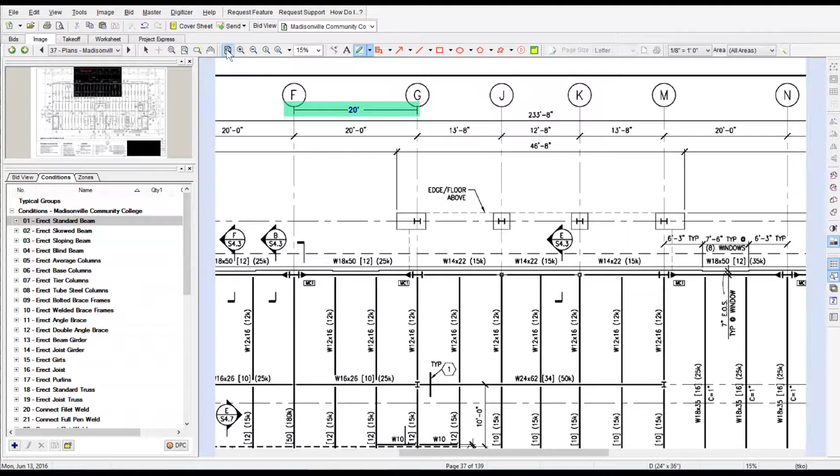In this video, I'm going to do a full takeoff on a 3-story community college, from start to finish. I'll put it into the Steel Erection Bid Wizard, get the price, the schedule, task summary, and schedule values. The project took me 1 hour and 49 minutes to complete from takeoff to getting the complete price. This video is sped up, so it will go quicker.

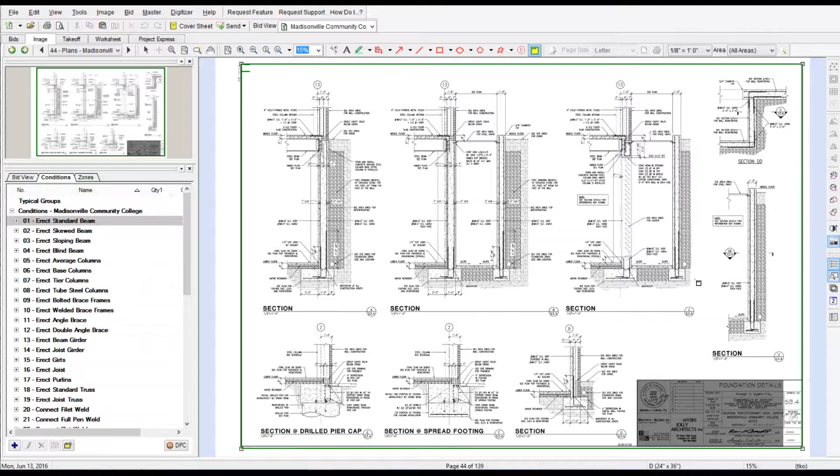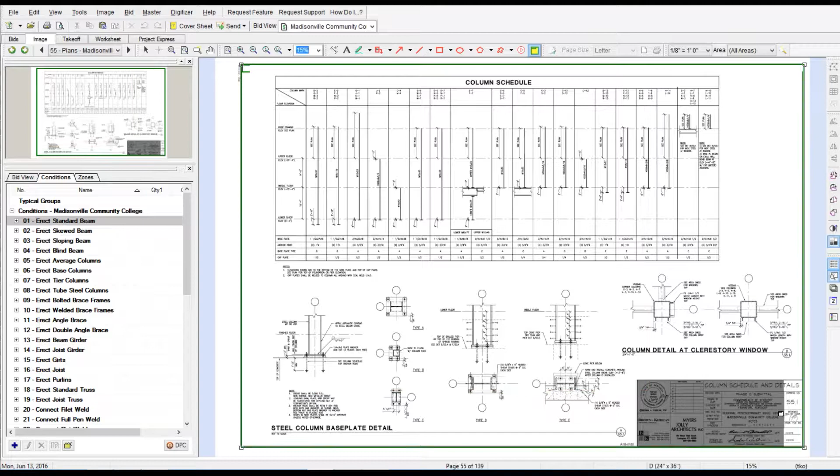I'm trying to give you a feel for this, and I'm going to create a video series showing the power of Steel Erection Bid Wizard and on-screen takeoff on all different types and complexities of projects, from simple warehouses to this 3-story community college, which is a bit more complex. I just want to give you the process so you can watch it quickly and see if Steel Erection Bid Wizard and on-screen takeoff is a fit for your company. I think you'll see that it is, and that it really doesn't matter what the complexity of the project is, Steel Erection Bid Wizard can get you a competitive price, and on-screen takeoff will get you that takeoff very quickly.

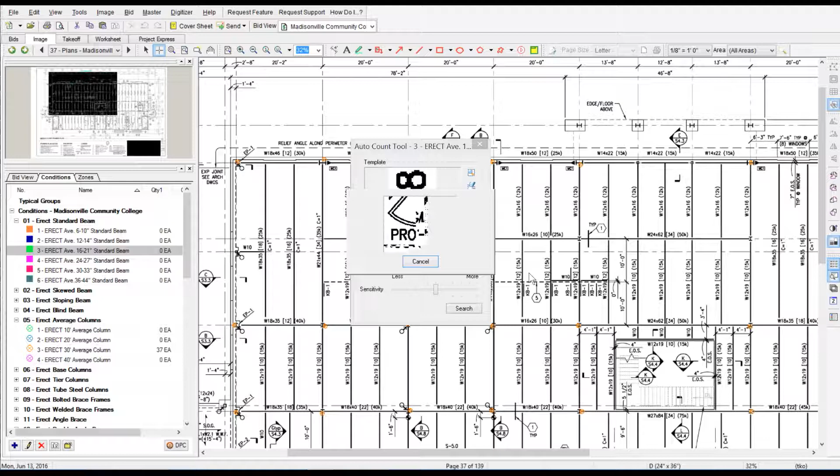So basically, I went through and verified all the scale was correct on all the takeoff sheets. Then I set up the detail sheets, and now I'm going through and doing a quick count. Right now you see me using the auto count feature inside on-screen takeoff.

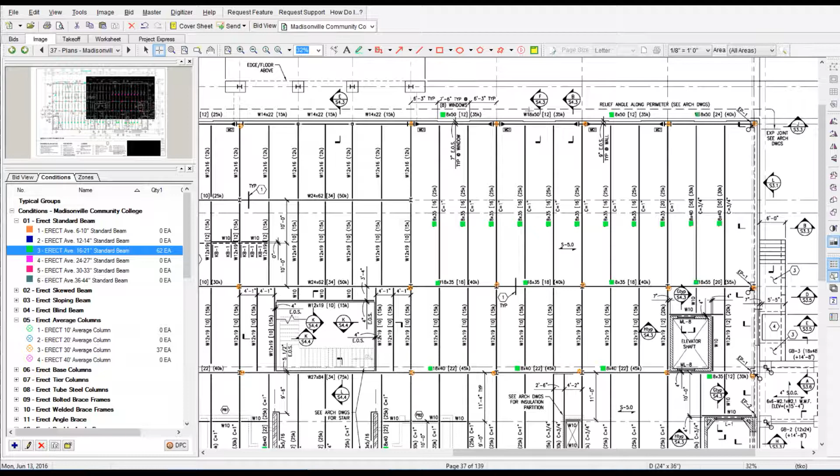This really speeds up the process. The results depend on the quality of the drawings, of course, but it definitely speeds things up and will count those beams for you automatically on the page. Of course, you still have to go through the page and verify that all the beams were counted, but it's just a way to speed up the process.

Sometimes I'll do an auto count, and sometimes it's just quicker to go through and count manually, depending on the project. It might be quicker to count by hand than mess with the auto count, but on this project, the auto count was a good fit.

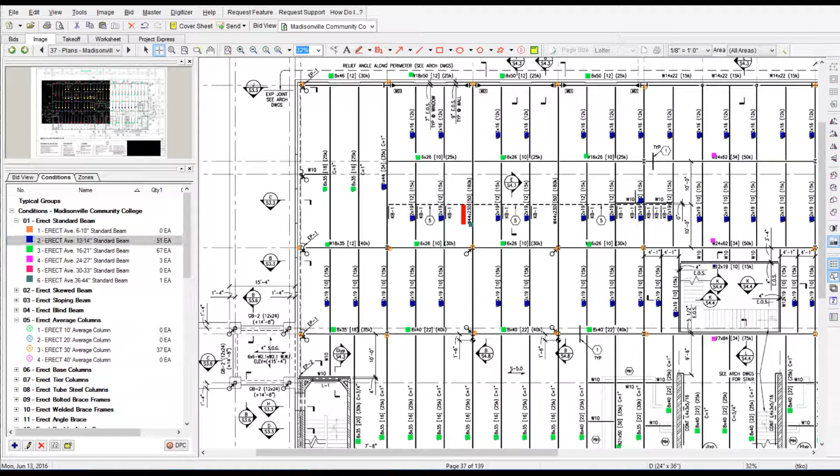You see I just highlighted that beam in red because it was like a 250 pound per foot beam. So that's just a quick callout to myself to make sure I get a crane that can handle that beam.

I'm not going to sit here and talk this whole time. This video is about 22 minutes long from start to finish, but I want to keep that whole video in there to let you see the full takeoff process, all the way from the export out of on-screen takeoff to the import into the Steel Erection Bid Wizard, where you get the price, schedule values, and the whole process.

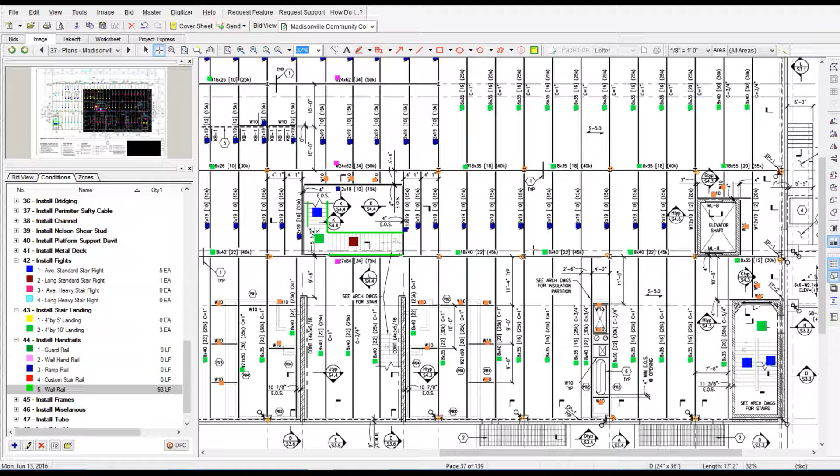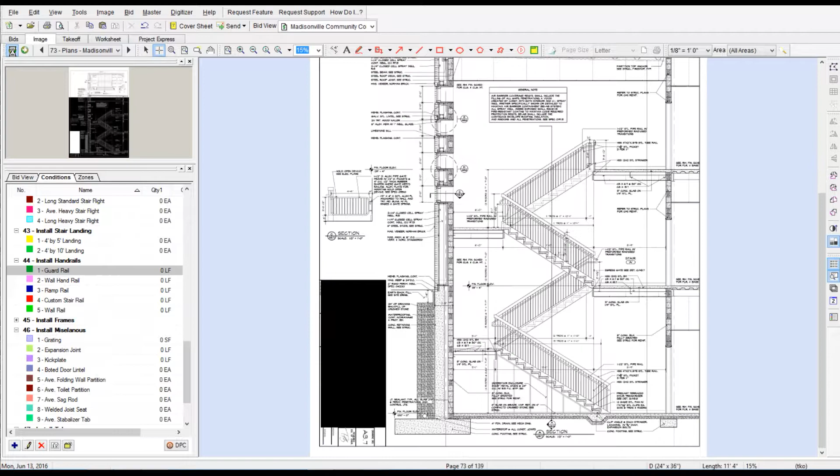I started using on-screen takeoff in 2002. Once I got it set up, I started developing the Steel Erection Bid Wizard around it, and over the years it's evolved into a completely different animal from day one. I developed the Steel Erection Bid Wizard to work with on-screen takeoff because I went digital in 2002 and wanted to figure out a way to simplify the takeoff estimation process so it could be foolproof. Really, you're basically building that job on the plans during takeoff, and then going out in the field and building it in place again.

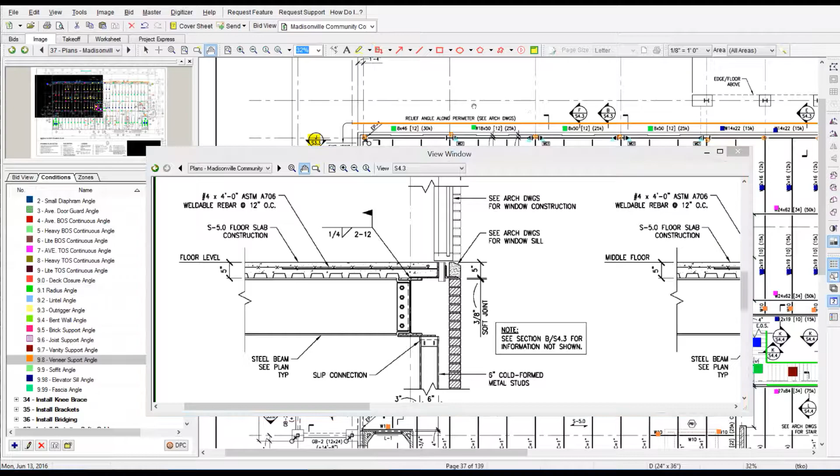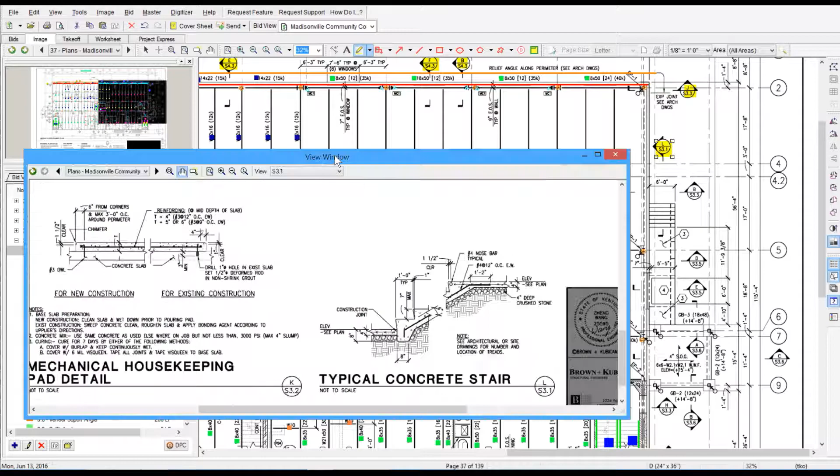I want to put this out there with different complexity of projects because I know it's hard to go from old school type takeoffs. People are set in their ways, but the world has gone digital, and a lot of erectors still do pencil and paper takeoffs on yellow tab, just doing it old school. The tools are out there to make that transition, but it's harder for the older generation to embrace the digital world, and some just won't do it. But we have a new generation coming into our industry that's good with computers.

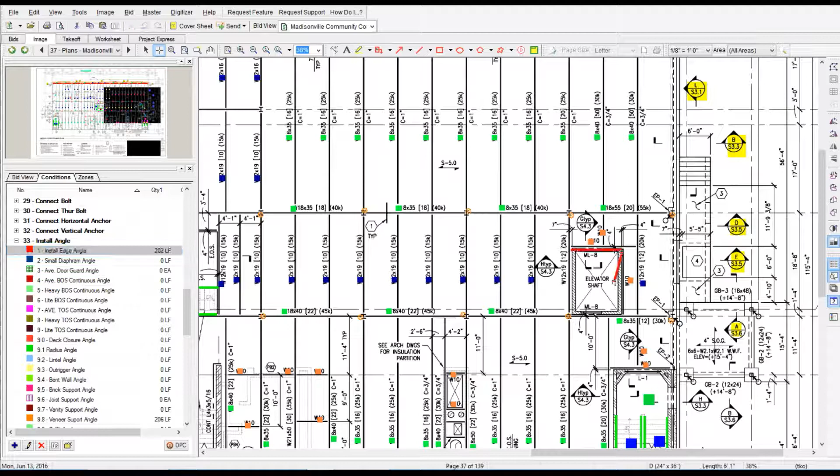What I see as a benefit of the Steel Erection Bid Wizard is a company's ability to take that estimator's knowledge and plug it into the Bid Wizard, make it fit your company, add your own tasks, add your own production rates, and take that long-time estimator's knowledge and plug it in. That way, when he's ready to retire, you'll have a system in place and can simply train somebody else to take that position over.

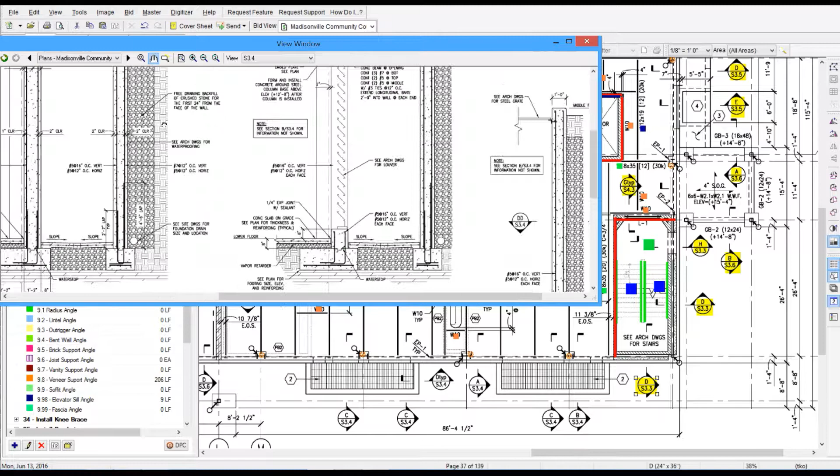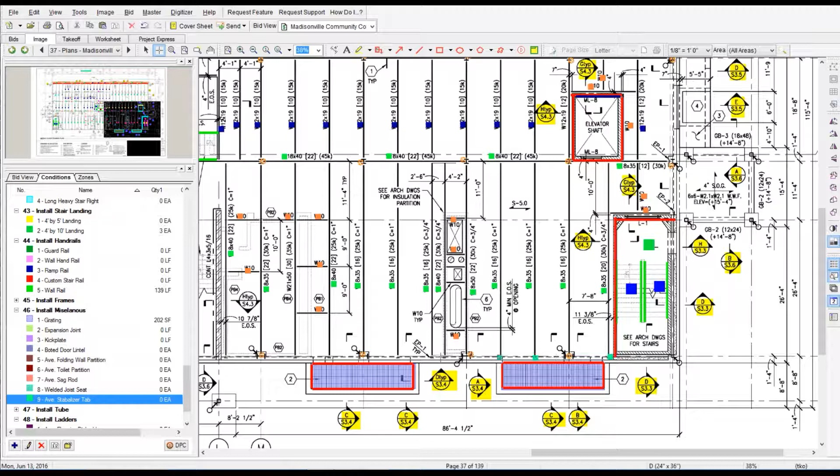So you'll see me going into every detail, and you'll see my second view window on the one screen. I wouldn't do that normally - I'd have it on a second screen off to the left - but I'm putting the detail sheet on the main plan so you can see it in this video. It slows me down because now I have to drag that detail view window back in every time, where normally I'd just be looking left to right.

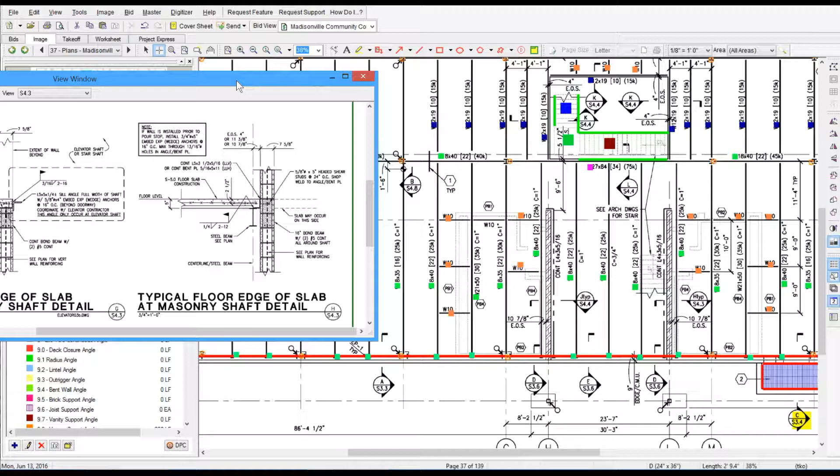I'll say it again, you're better off spending the money on large computer monitors. 27 inches would be the smallest I would go, 32 inches would be the best - I'd definitely say a 32-inch computer monitor is ideal. The reason I say computer monitors is because the resolution is so much higher.

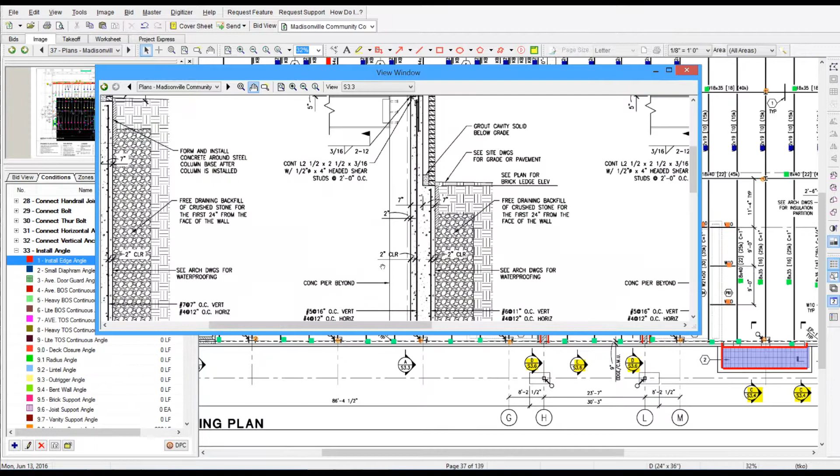A lot of people want to go get a big screen TV because they're cheaper and have a huge screen. The challenge is, yeah, they call it high definition, but in my experience when you put that plan on a big screen it isn't as crisp because the resolution isn't as high, so you don't get to see the plan all that clear. The more resolution you have, the easier it is on your eyes to read that plan. So even with a big screen, you'd still have to blow the plan up to actually read it, even though it's huge.

That's why I suggest a 32-inch screen with the highest resolution you can get - it's like 2450 by 1650, something like that. You'll be able to look at that plan just like you're sitting there looking at it on a table. If you get an estimator set up that way, with two large screens, where he's not straining his eyes and not having to pan in and out so much, it makes a whole different ball game.

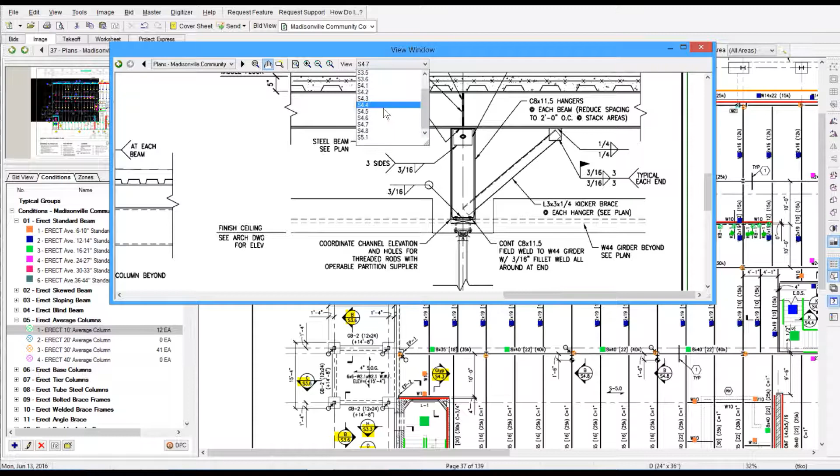One thing I point out too, in the Bid Wizard I've got right at 300 tasks, and of course you have the ability to adjust those tasks, rename them, change production rates, do all that. But what I really want to point out is...

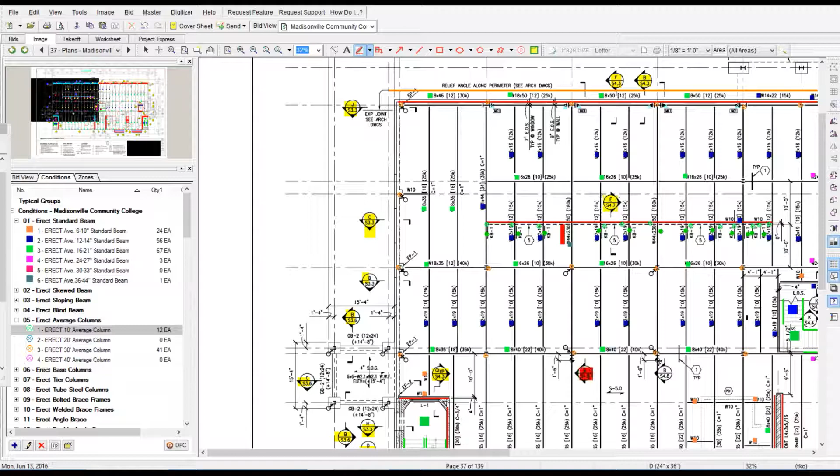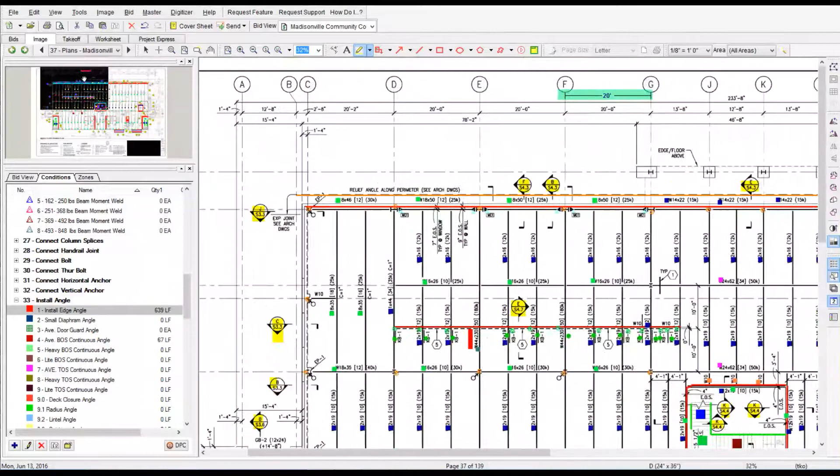You might see on a project some HSS tube steels, some bolted for a curtain wall, whatever it may be. In my program, the mindset I use is: if it sets like a beam, hangs like a beam, I'm going to take it off like a beam. So if I had an HSS tube steel on a curtain wall, I'd take it off as a W21, something like that. If it's welded on each end instead of bolted, I'd probably jump it up a beam size, or go up to a blind category just to cover the weld. But of course you have the ability in the Bid Wizard to change that task, make your own task calling it HSS tube steel bolted or welded, and get a production rate for it, so you're taking off exactly what it is on the project.

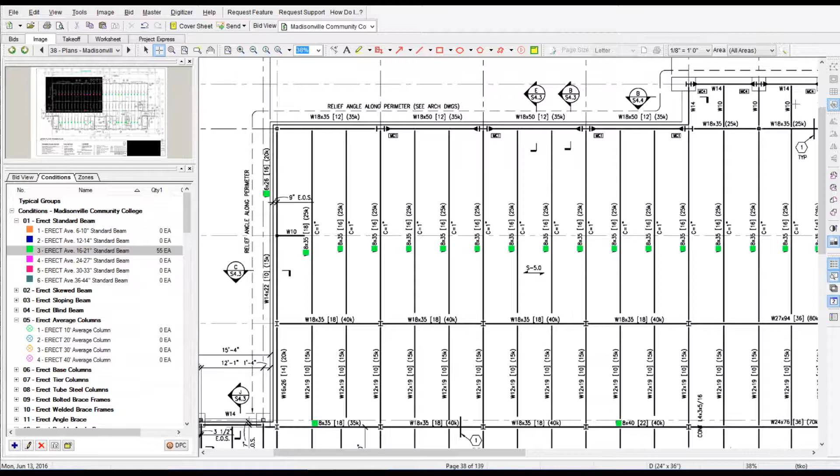To me, as long as I picked it up, I was happy. So like another example, elevator guide rails - if it sets like a column, you could take it off as a column.

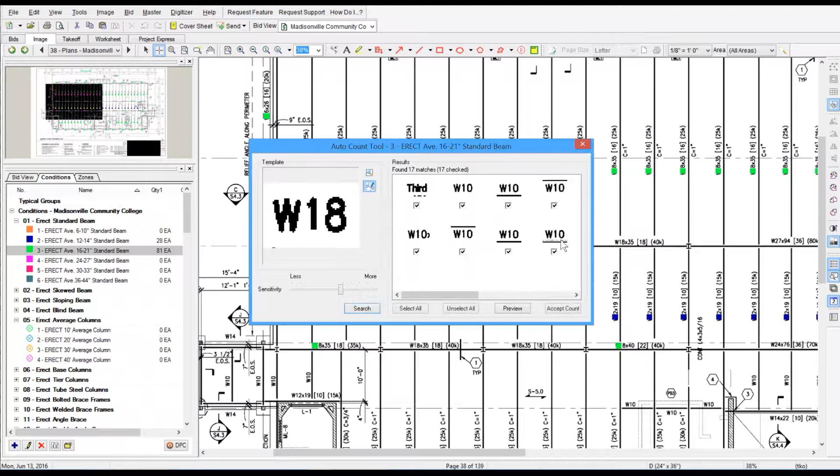Now, elevator guide rail, I would take it off as a blind column. That would get me the dollars in that guide rail, enough money in that guide rail off a blind column. But that's entirely up to you. You've got to look at the production rates that the Bid Wizard spits out and decide whether you want to do it that way, or create a task called elevator guide rails.

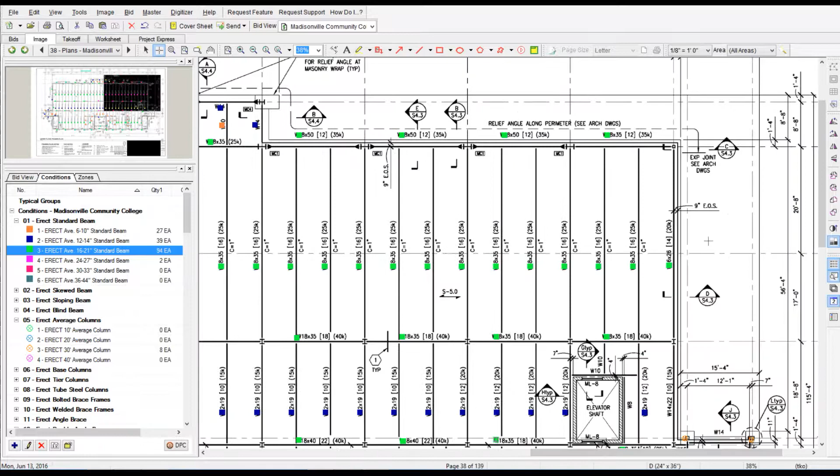I've said it in other videos before, I think the hardest part about going digital for any takeoff program is creating the conditions. And what I mean by conditions is the beams, angles, columns you see on the left-hand side of the screen that I keep clicking on and counting. Because when you buy a digital takeoff program, it doesn't come built with those conditions. You have to build them.

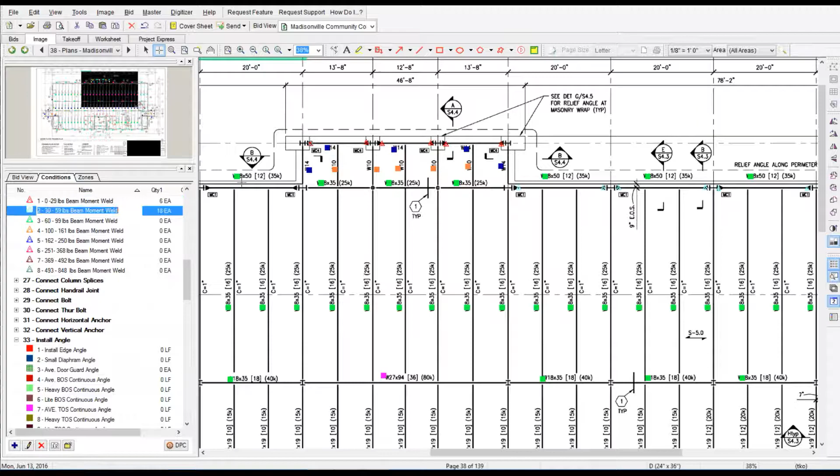At Steel Estimating Solutions, I create that. It's called a plug-in. So if you purchase Steel Erection Bid Wizard and decide to go digital with on-screen takeoff, I give you that plug-in. You plug it into on-screen takeoff, and out of the box, you're ready to start doing a takeoff.

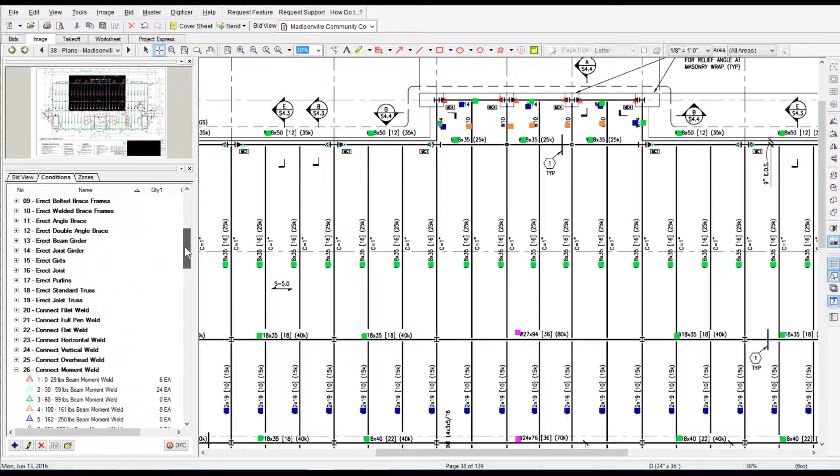But with that said, I also integrate with 3 other programs: PlanSwift, Bluebeam, and FabSuite, which are all great programs. FabSuite is more for a fabricator, who does the fabrication takeoff inside FabSuite, and it pushes the erection portion out into the Bid Wizard, which makes it real sweet. The fabricator just does one takeoff, and gets his quantities for his erection price out of FabSuite to go into the Bid Wizard.

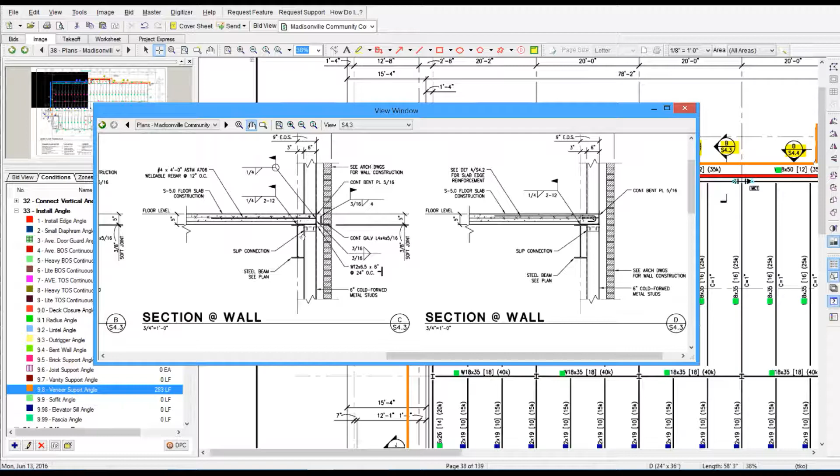PlanSwift's a good program. I just like the functionality of on-screen takeoff better. It's been around since 1988. I think it's the Cadillac of all programs.

Bluebeam is an amazing program as well. The only challenge with Bluebeam at this point is you cannot copy and paste, which is a huge time savings when you're doing a takeoff with typical bays, where you can take off one bay, copy it, and paste it in the other typical bays. But you can't do that with Bluebeam.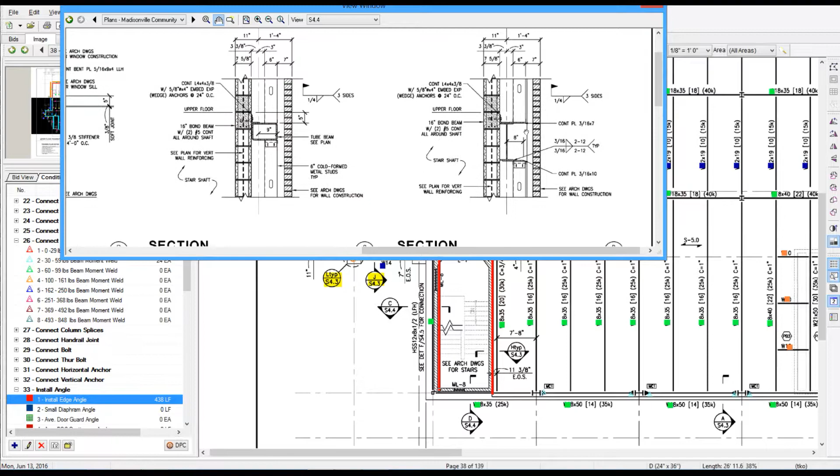I would say Bluebeam is probably about 75% of a true takeoff software. That wasn't what it was designed for, that wasn't its intent. But Bluebeam has some amazing features and it's much cheaper. You just don't get the full takeoff benefit.

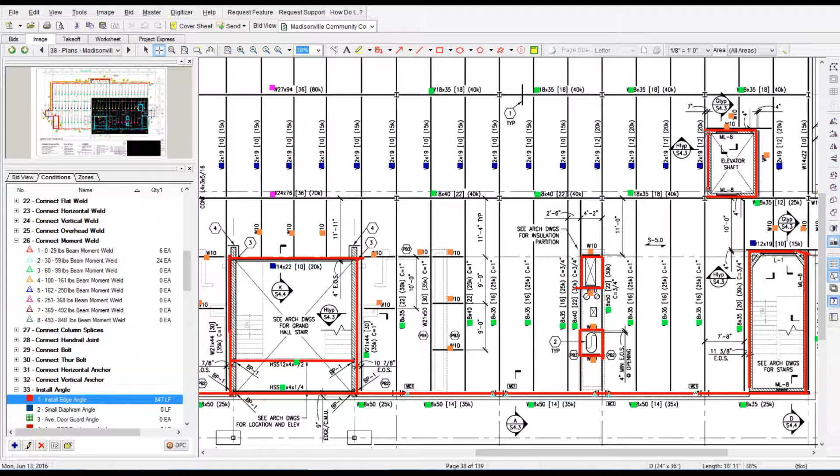So in my opinion, a person needs on-screen takeoff and they need Bluebeam, because Bluebeam has some really good fill components and a lot of other benefits inside of it as well. I'm not a reseller for Bluebeam, not a reseller for PlanSwift, not a reseller for FabSuite. I partnered up with on-screen takeoff, and that's the program I sell.

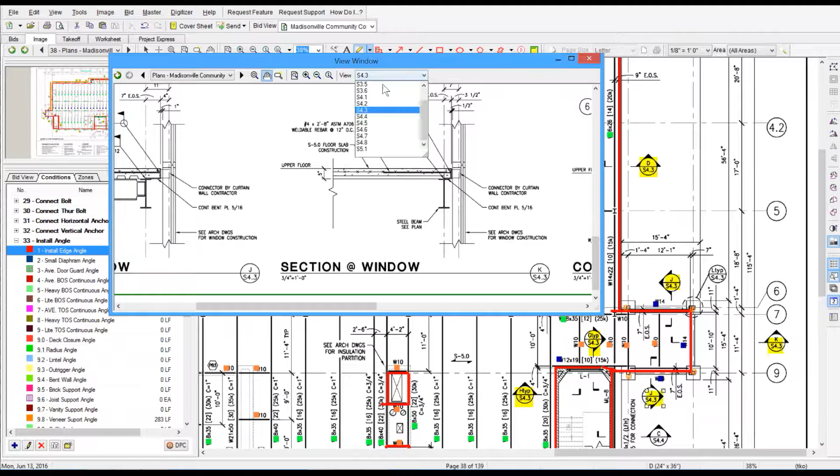You can see as I'm going through, I do have the video sped up, but you can see me taking off deck right now, and how much quicker you can just run through there. It doesn't matter the shape of the building, I get an exact square foot for that project. And I'll point out, you're going to see me put deck over top of the stairways and some of the openings.

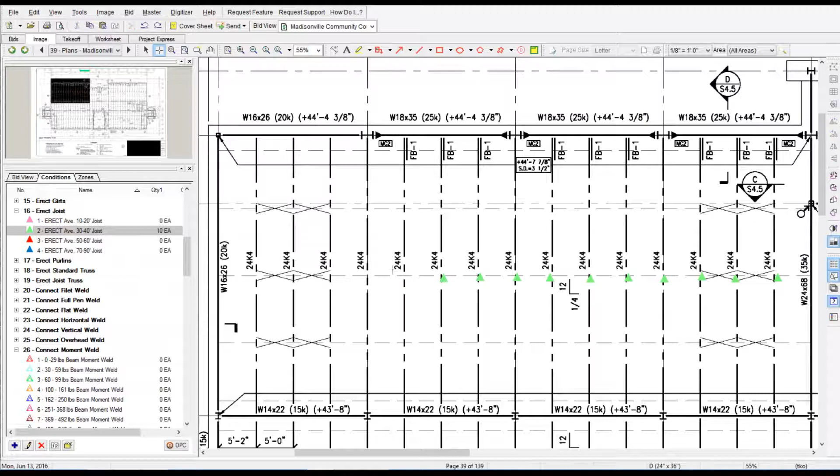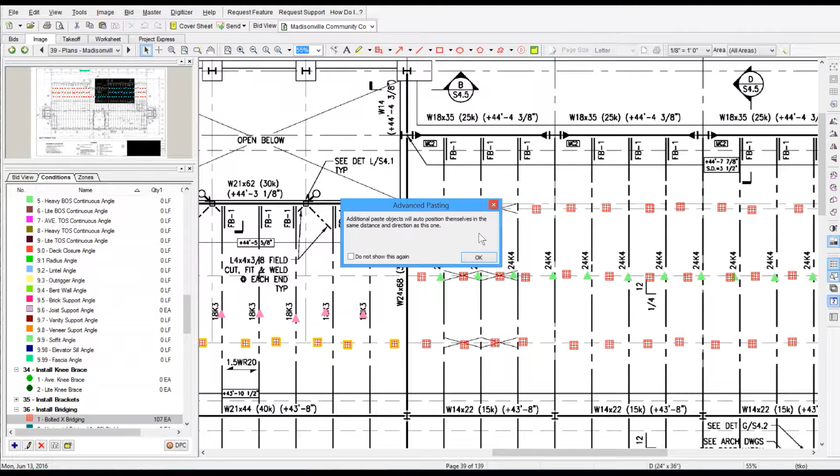I don't cut those out, and I do that on purpose, just to kind of pad the job. If you wanted to, you have the ability in on-screen takeoff to do the takeoff and then cut out those areas around the stairways. For myself, it just gets me a little bit more money, a little bit of padding in there. If I was trying to get really tight and it was real competitive out there, I'd probably consider cutting that out, but I never did. I always just went over it and called it good.

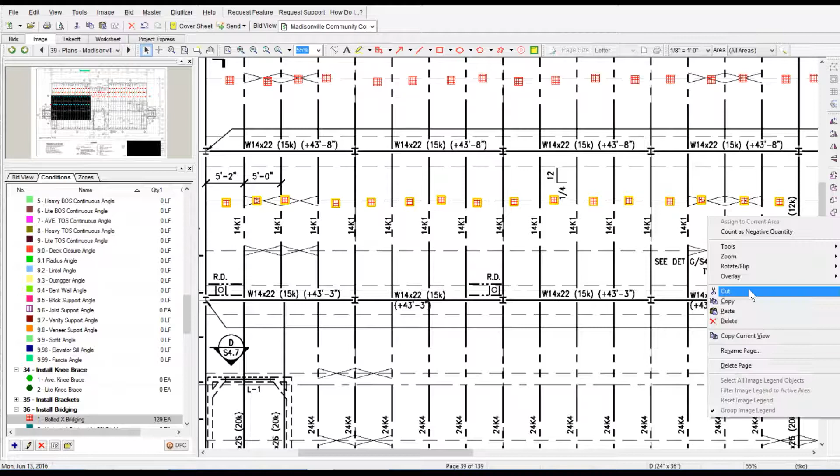You can see what I'm doing right now. I'm up on the roof. There's bar joists, there's like areas, so I'll just take off a section. This project has some X bridging, so I count the X bridge and the joist in that one area, copy it, and start pasting in other like areas. Then go to the next page, just copy the X bridging, move it into place.

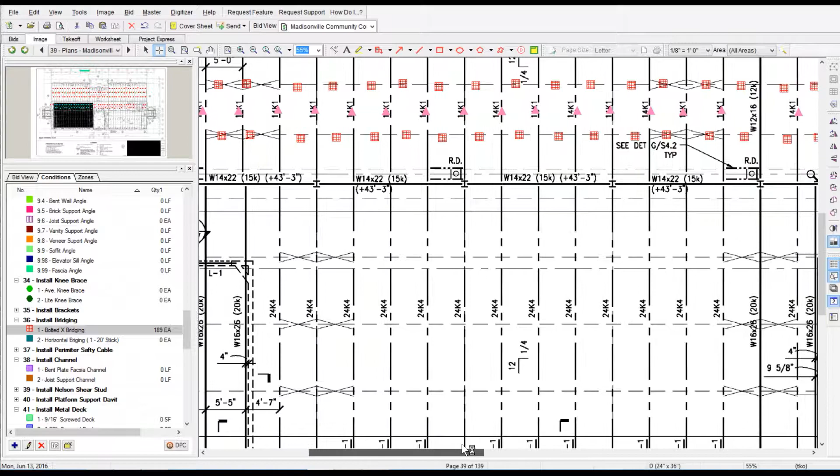You'll just see how it speeds the whole process up, so you're not sitting there clicking away. When you look at it from this aspect, when I talk about on-screen takeoff being copy and paste, and you don't have that ability in Bluebeam, you can see where it would definitely take you a lot longer to do a takeoff.

In all my advertisement, I always say I can save you 50 to 60% on your takeoffs and your estimates, and you're seeing it in real life.

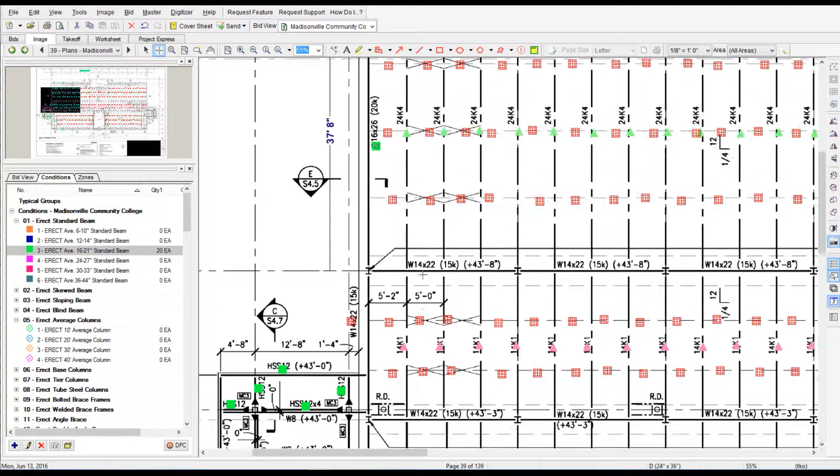Right now I'm doing a complete, detailed takeoff, and it took me an hour and 49 minutes to do the takeoff, upload the plans, put them in the system, do the takeoff, bring it into the Steel Erection Bid Wizard, get my price, adjust it, massage my bid, have my task summary built for me, broken out by area, which you're going to see here at the end. I break this whole thing out by area, by floors. And I also have the schedule built for me.

My bid proposals are one-touch bid proposals. I can bid up to 10 general contractors at the touch of a button.

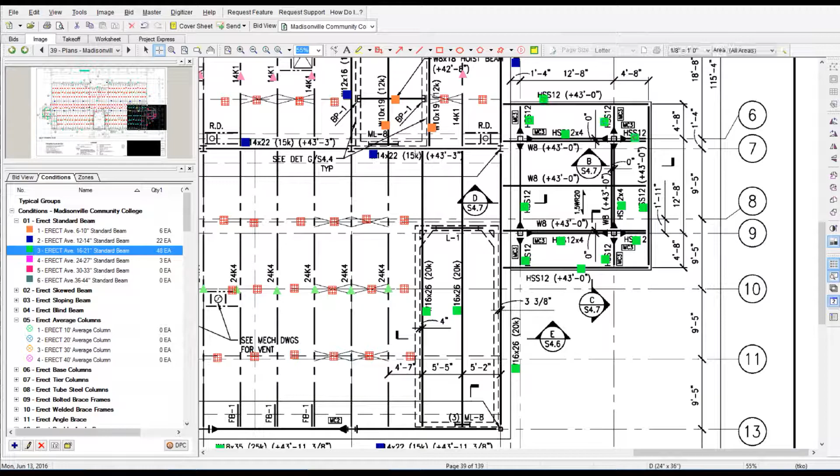So that's the process. I don't know how long it takes somebody by hand to take this project off, but I know they're not going to do it in 2 hours with complete price, schedule built, bid proposals and everything made. It's just not going to happen. I'd say you're probably looking at 4 to 6, maybe 7 hours to do this takeoff if you're doing it hard copy.

Now, granted, you could look at this job and say, with your experience, do a square foot project, square foot the building, and say, yeah, it's going to be this much a square foot. Throw a price out there, which I did in the past as well. Just throw a square foot price, look at it, say well it's going to take this long, throw a quick number at it. But the reality, we got away from that.

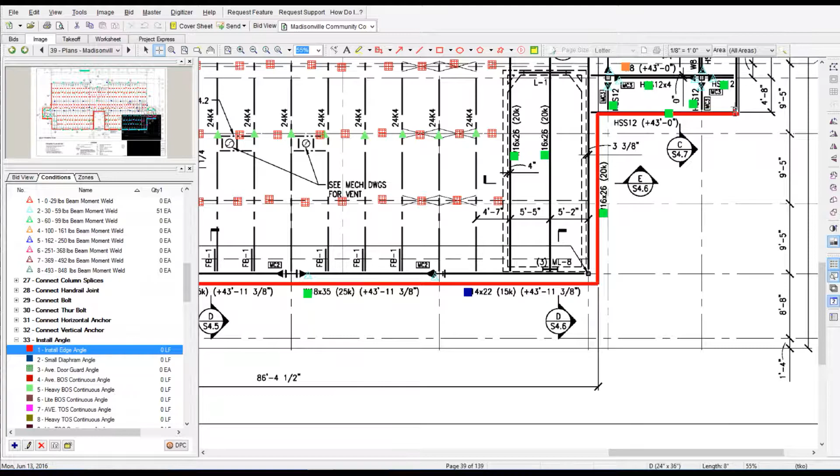We got the tool here to do it fast. And what I'm going to get out of this is I'm going to start creating data, and I'll be able to track exactly where my money's going, where I need to improve, where I might have dropped the ball. Everything is trackable at that point. Where on a square foot price, yeah, you're out there, got a quick number out there, but to get any trackable data out of it, it's just not going to be there.

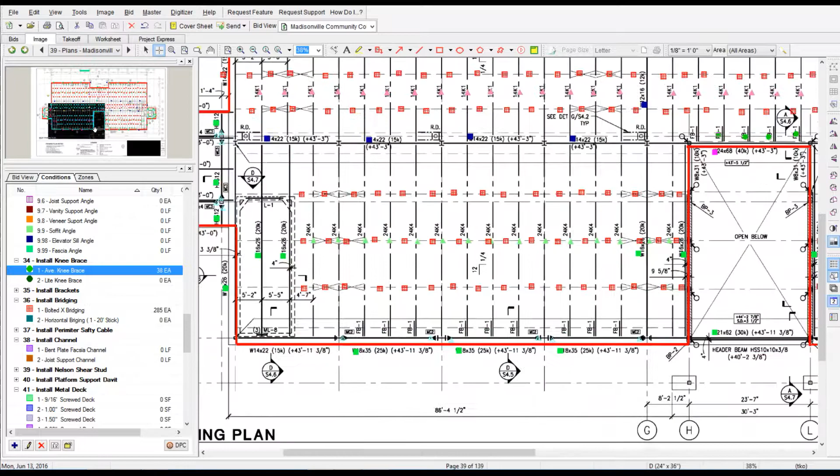And then on the back end of this, I'm in the process of creating a project management wizard, which is going to tell you in real time whether you're making money or not, which is going to be another benefit, because that's always a challenge. We're out there on the site, we don't know whether we're making money or losing money pretty much till the end. We can track our costs, see where our dollars are going, but we truly don't know whether we're making money or losing money till we get to the end of the project. The project management wizard is going to change that.

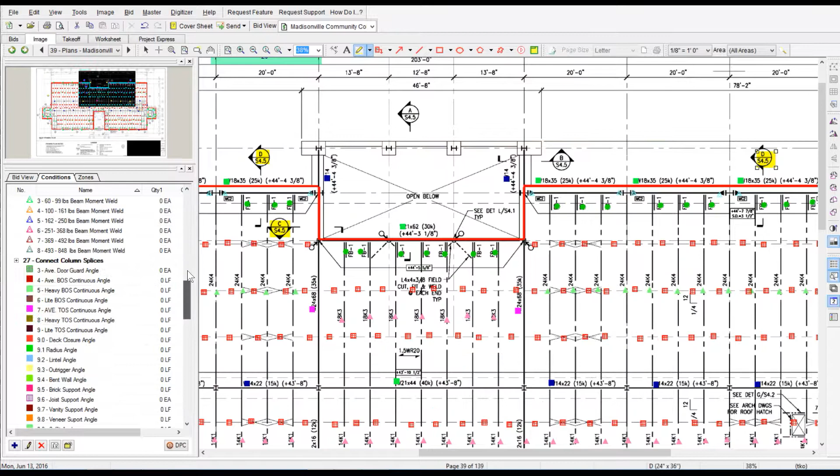Plus, it's going to have an equipment tracking feature, help you with payroll, help you with month-end billing, and continue to build from there. That's my goal, I want to be the go-to guy for steel erectors in this industry, and that's what I'm trying to do.

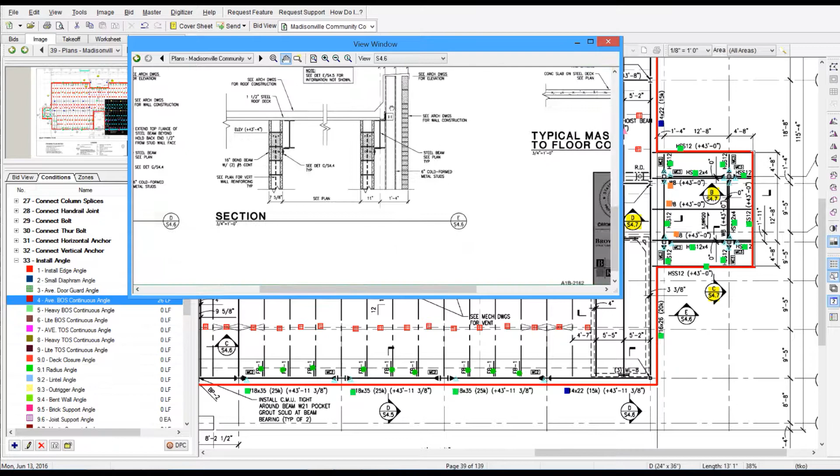We're almost to the end of it. I think we got about five more minutes, something like that.

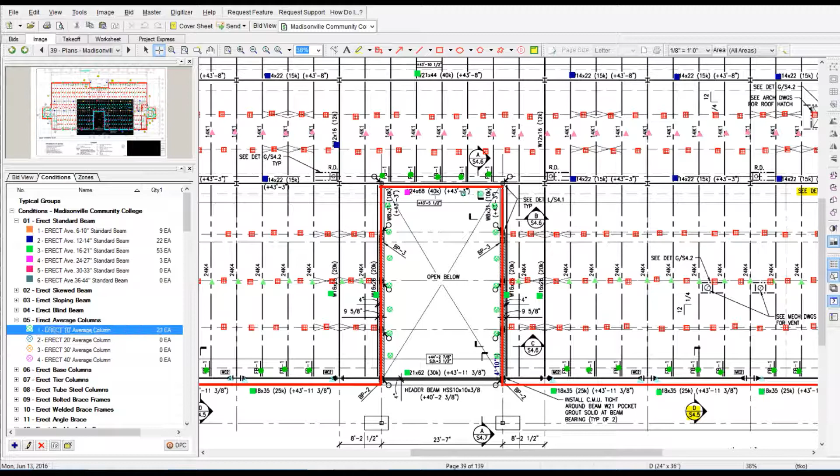And that's another thing, you see me marking off all the details. So you look at that detail, take off the detail, and highlight the detail, and it's taken off. That's on-screen takeoff—it's colored, it's counted. You can't go wrong.

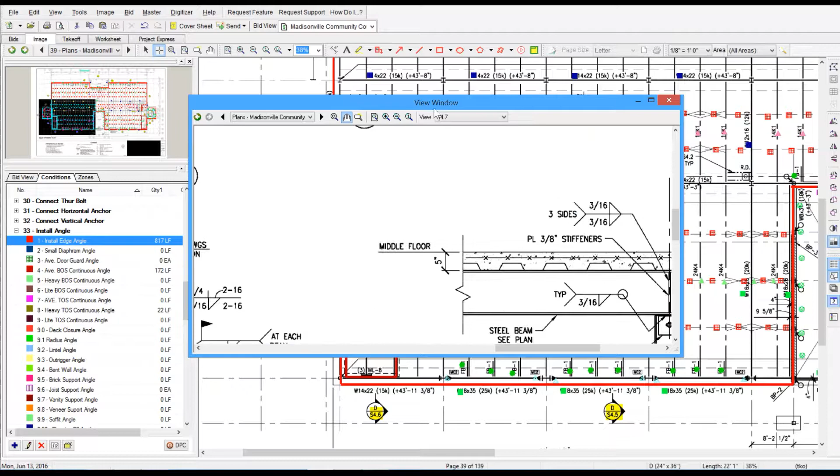It really doesn't take that long to run through and look at all the details, especially if you have that second screen up—looking left, looking right, you're not flipping pages. You're just going to that detail window. At the top of the detail window there's a drop-down box, you go down to that detail, select the sheet, and go to the detail. Makes it simple, fast.

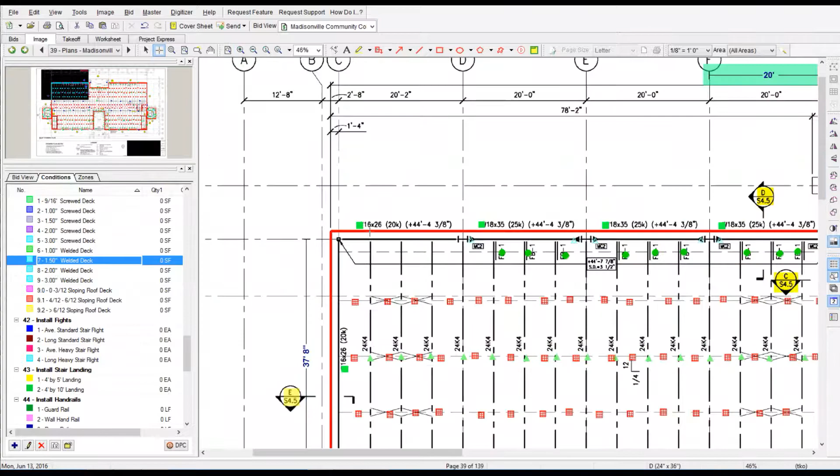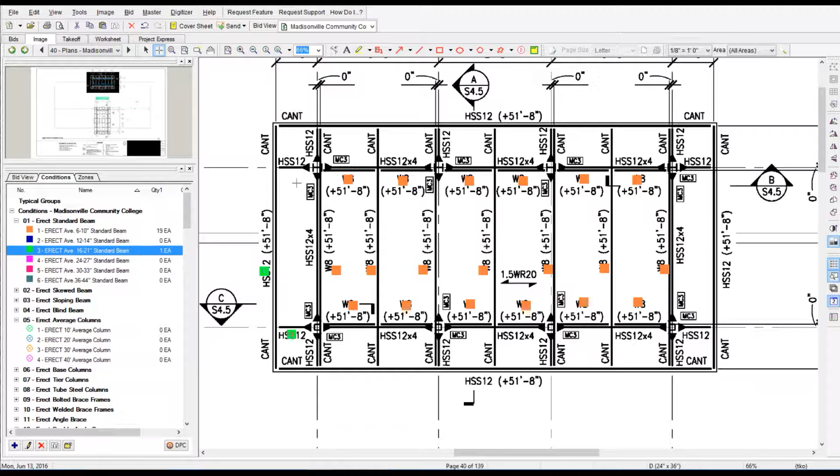You see up here on this roof there's a bunch of HSSs on the high roof. I'm just taking them off as a 16 to 21.

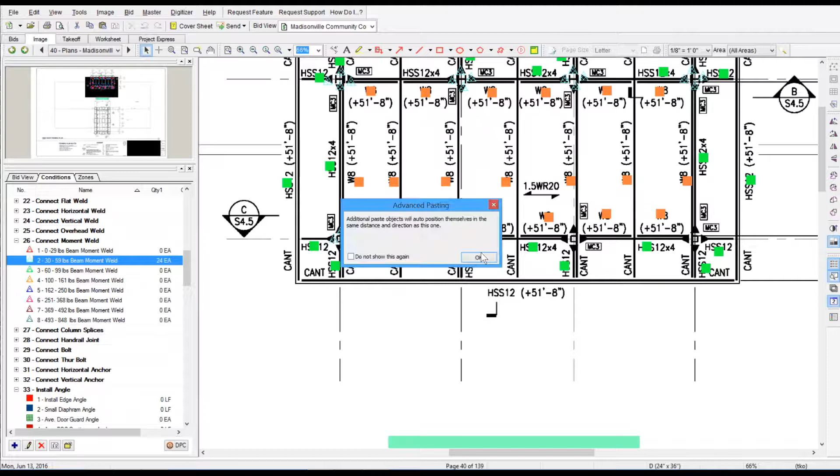Now we've got all these moments that are the same, so I just start copy and pasting those. Instead of clicking 4 times at each one, I just copy and paste, and it cuts down on the repetition.

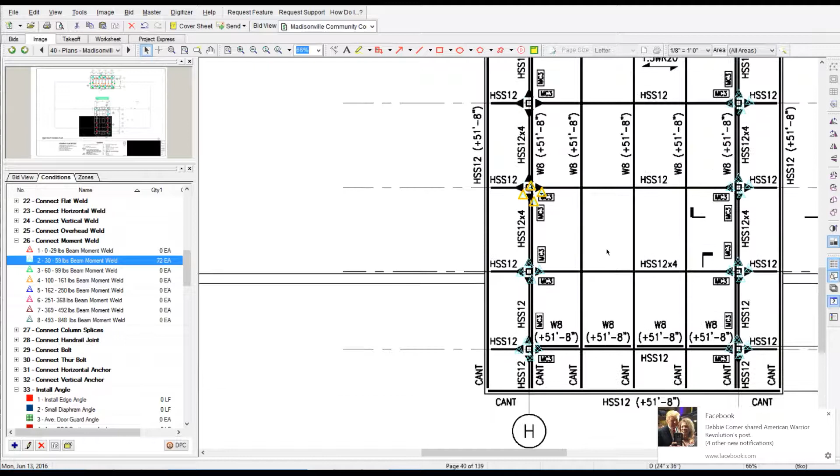Once you get past the learning curve, it really is pretty simple—once you get past learning how to get around it. And with me, I'm available to help you guys out, get you started, get you past that learning curve. That's the service I'm providing, helping you transition to going digital.

And I tell you, once a person goes digital, they'll never go back. I started doing this back in 2002, and after I got it down, I never want to see a hard set of plans again.

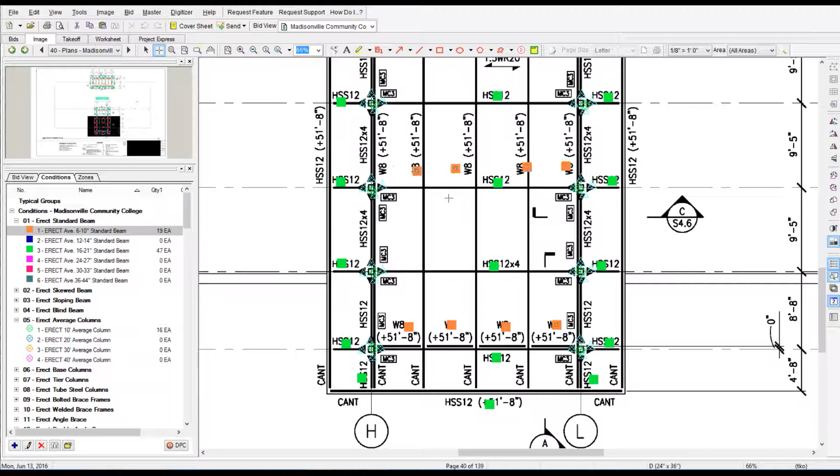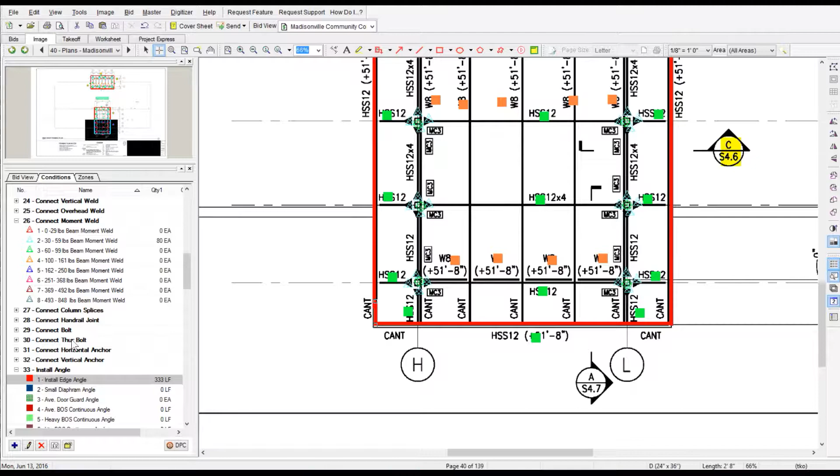Another thing we haven't talked about—say this project was a 65% project. We're doing design build, and then they send me out 3 weeks later at 80%. I simply come in, take those 80% drawings, overlay them on the drawings I just took off, and everything new comes out in red. So instead of retaking the whole job off again, I just take off what's in red, and we move forward. That's probably one of the biggest time-saving features I could possibly have.

We did a lot of design build, and that was always a pain, having to keep relooking at the jobs.

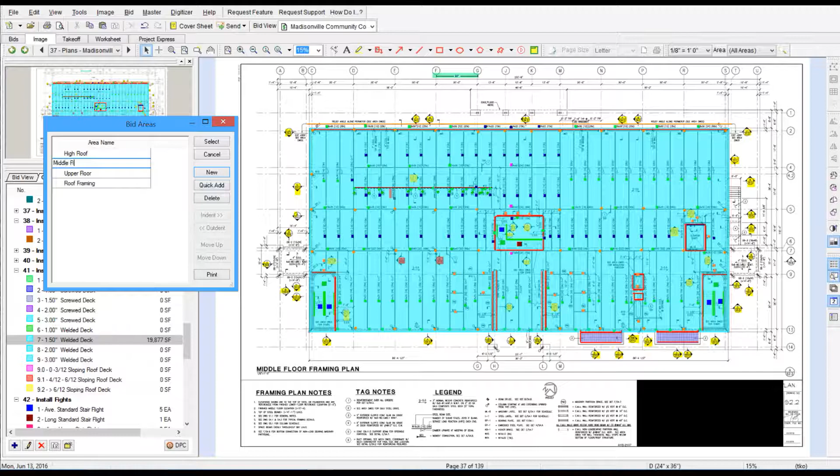So right now I'm setting up the areas—we just did high roof. You type in the area, select it, and assign it to that area. Now I've got all these takeoffs assigned by areas, which is sweet, because my price is going to be broken out by area.

Now I'm exporting it out, saving it into the job folder. Then I go inside the bid wizard, create a new bid, go down to task. I've got to create the areas in the bid wizard before I do the import.

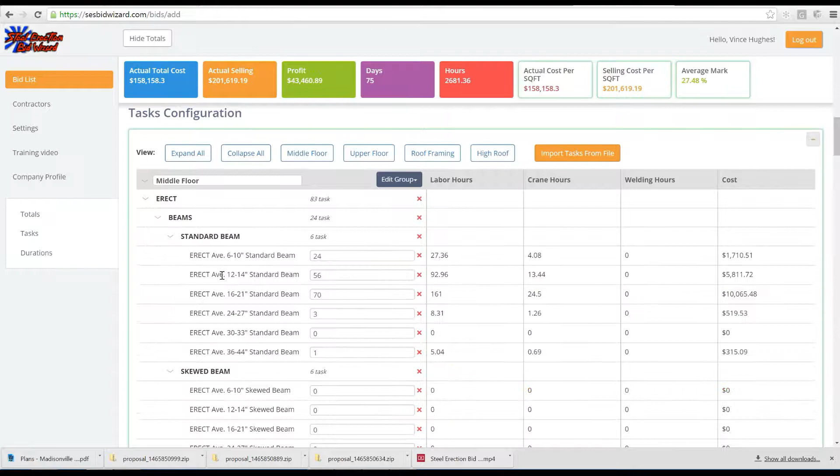I'm adding equipment right now—real simple to add equipment, of course it's pre-set up inside the system. Add your crane, massage the bid a little bit.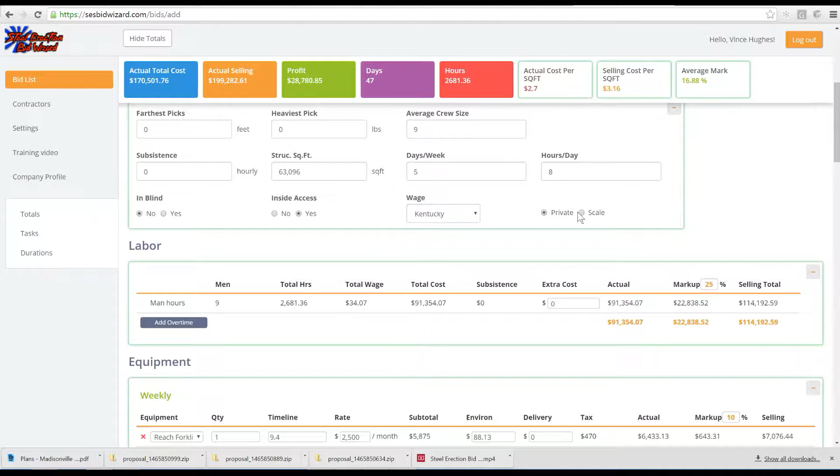You can see where you can have different scales for different states depending on where you're at. If you work in multiple states, Bid Wizard makes it real nice because you can create many different wage rates wherever you want to go.

Now we're going to build the schedule—you go through and see the schedule's created, and that's adjustable. Generate the task summary sheet, broken out by area, with schedule values, so you know how much the beams are, how much the columns are, all broken out.

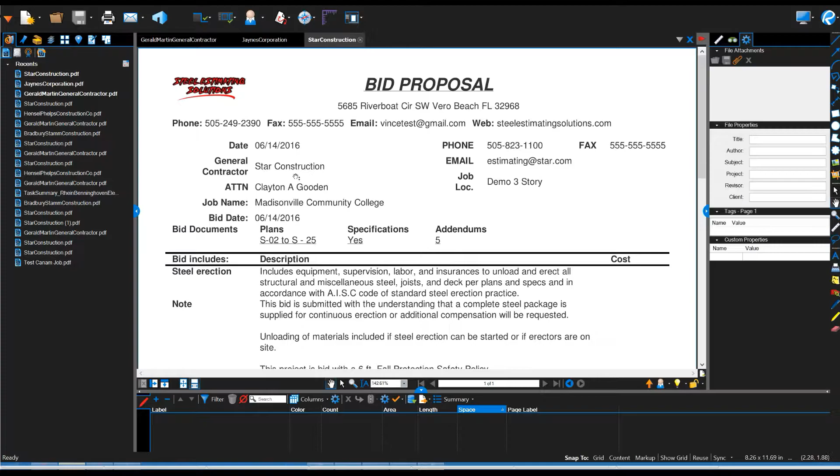Creating the bid proposal, selecting 3 general contractors—can bid one 5% higher, one 10% lower. Now I've got 3 general contractor bid proposals created, just showing the difference in the wage rates.